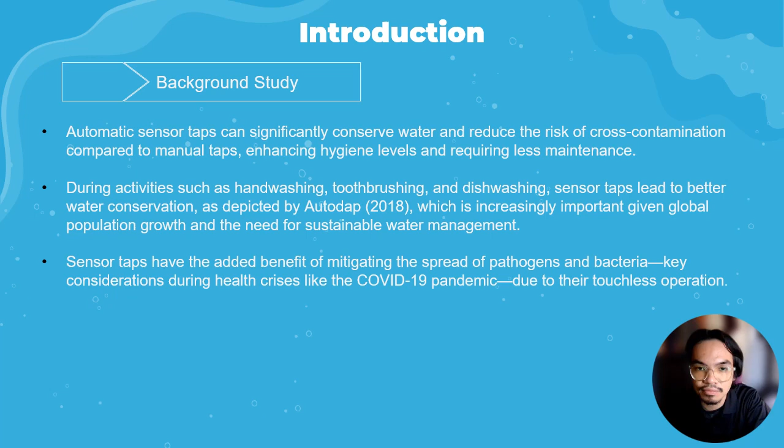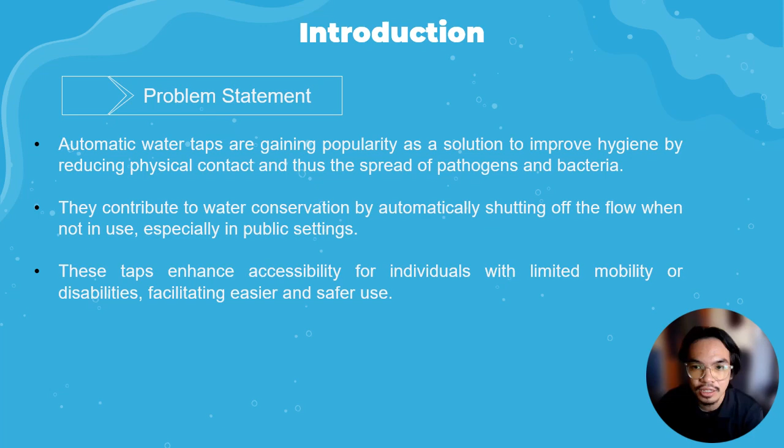The design of automatic tap control project tackles the pressing issues of maintaining hygiene and conserving water. Our automatic taps reduce the risk of spreading germs by limiting touch, save water by shutting off when not needed, and provide accessibility for those with disabilities.

Our design of automatic tap control project is focused on creating a tap system that not only conserves water and reduces time spent at sinks, but also minimizes congestion and manual touch points, thereby enhancing safety, minimizing space, and giving us a deeper understanding of PLC-based automation in tap systems.

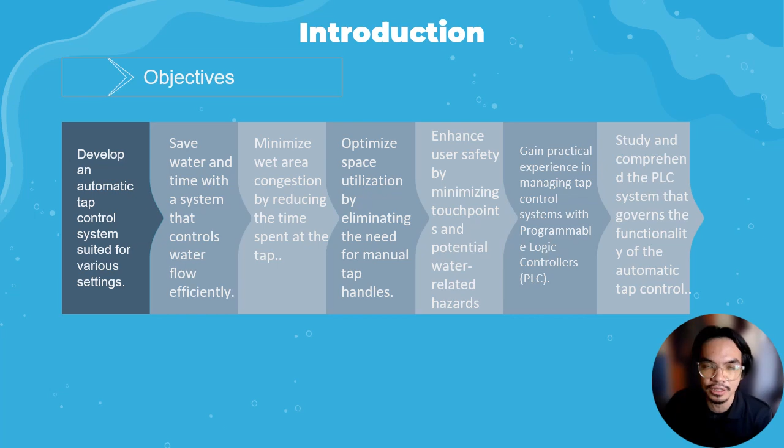In this section, we'll cover our methodology focused on 3 primary areas: concept design, design selection, and design evaluation. We'll see how each stage leads to the development of an optimized automatic water tap control system.

In the sphere of water tap systems, innovations span from Vani and Shrinidhi's Arduino-based remote control taps to Fitriyah et al.'s IR sensor-activated automatic faucets. Additionally, Hulukati et al. have introduced solar-powered taps with ultrasonic human detection, marking significant strides in water conservation technology.

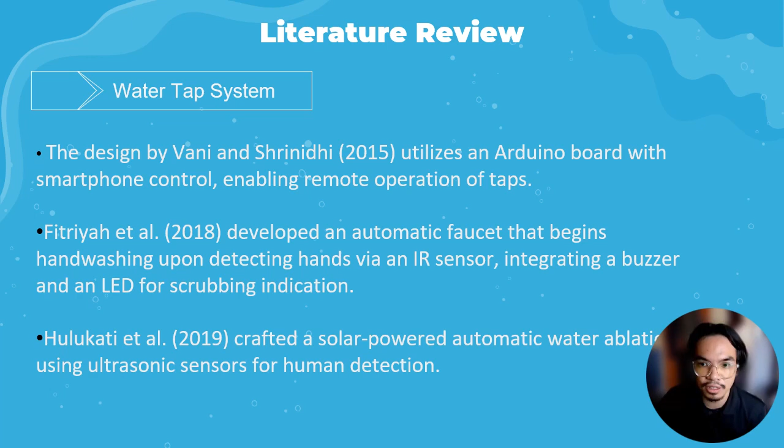Programmable logic controllers, or PLCs, are the backbone of our design of automatic tap control project, evolving since 1968 to become essential in process control and automation, interfacing with a variety of signals and programmable through intuitive ladder logic diagrams by engineers.

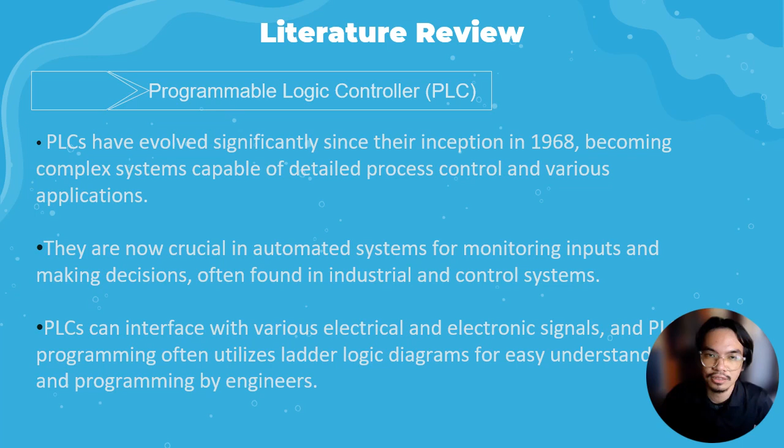Ladder diagrams are a key element in our design of automatic tap control project, simplifying the programming of PLCs for logical operations and enhancing their flexibility in managing our automated systems.

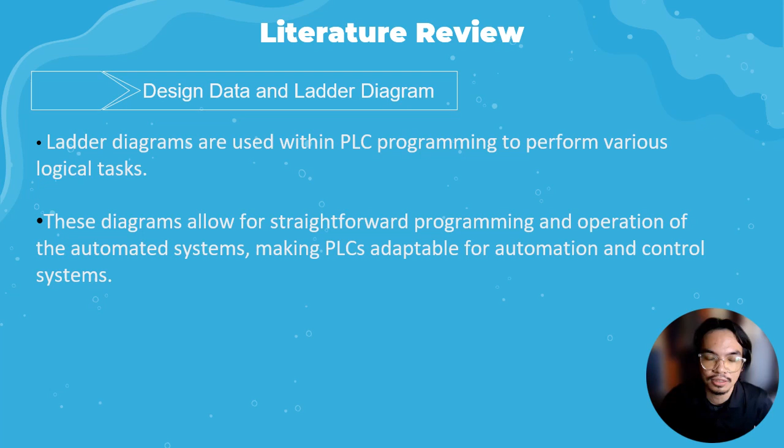Moving on to this session, we will cover our methodology, focusing on 3 primary areas: concept design, design selection, and design evaluation. We will see how each stage leads to the development of an optimized automated water tap control system.

Our approach was guided by an existing patent by Sloan Valve Company, which informed our choice of components. We analyzed parameters such as microcontroller type, sensor specifications, power source, and actuator model.

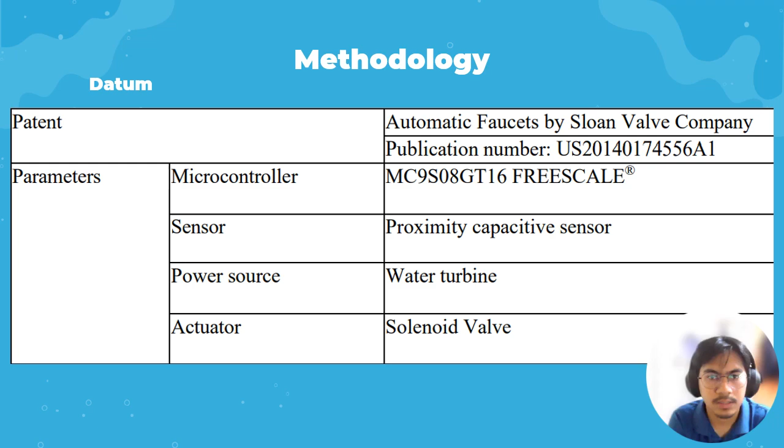We explored various alternatives for each component, considering different microcontrollers, sensors, and actuators, and evaluated them against our datum to ensure the best combination of functionality and cost effectiveness.

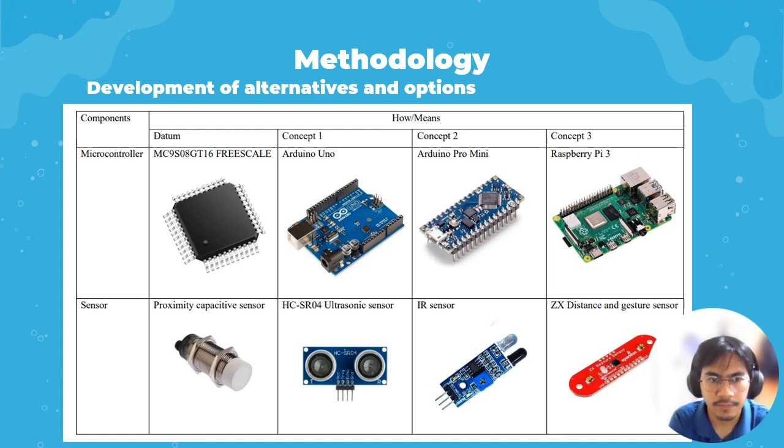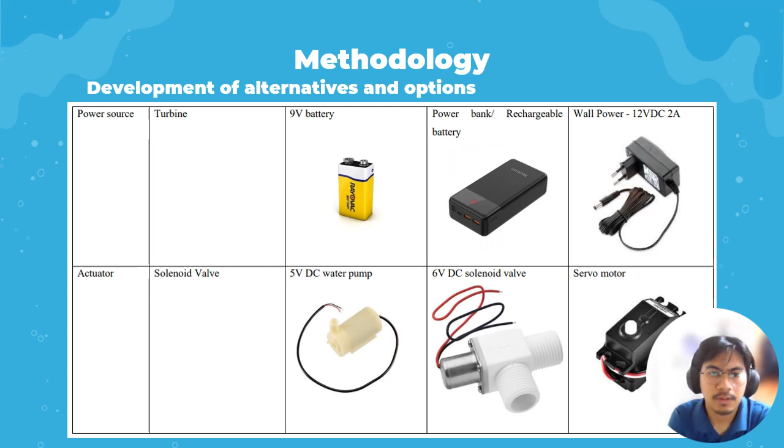Here we also detail our component options, from power sources like turbines or batteries to actuators such as solenoid valves and servomotors. These options were tested for compatibility and performance based on our literature review.

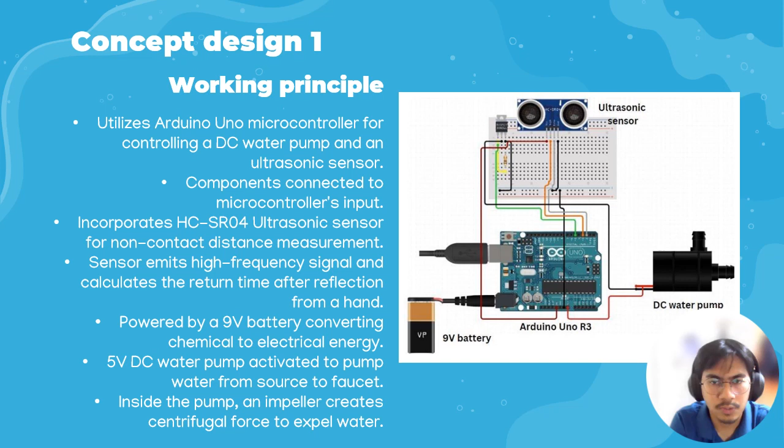So, concept design 1 uses the Arduino Uno and an ultrasonic sensor for distance measurement, controlling a DC water pump powered by 9-volt batteries. The focus here is on reliable sensing and efficient power use.

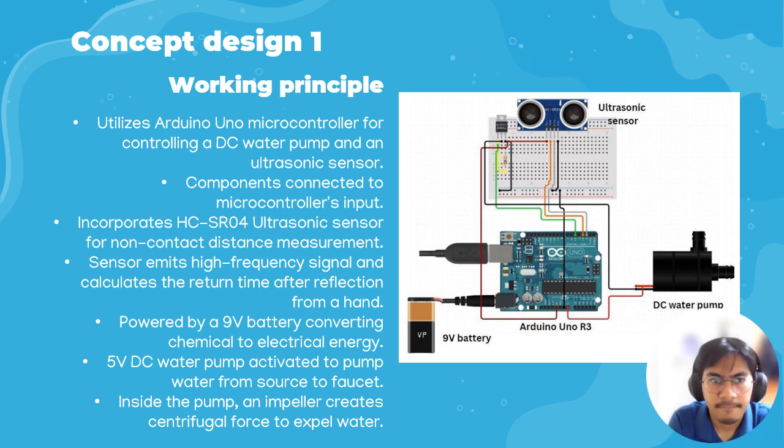In concept design 2, we switch to a more compact Arduino Nano and IR sensor for detecting presence. It's powered by a power bank for compatibility and uses a solenoid valve for water flow control.

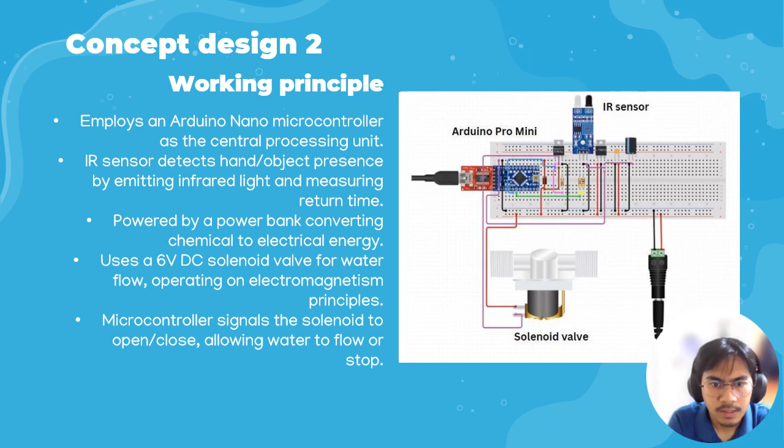Last but not least, our final concept design 3 employs a Raspberry Pi for sophisticated sensor data processing, using a ZX distance and gesture sensor for intuitive user interaction and a servo motor controlled by the Pi to adjust the water flow.

That concludes our visualization, where we have showcased our systematic approach in designing and selecting the optimal components for our automatic control system, each with a unique set of advantages.

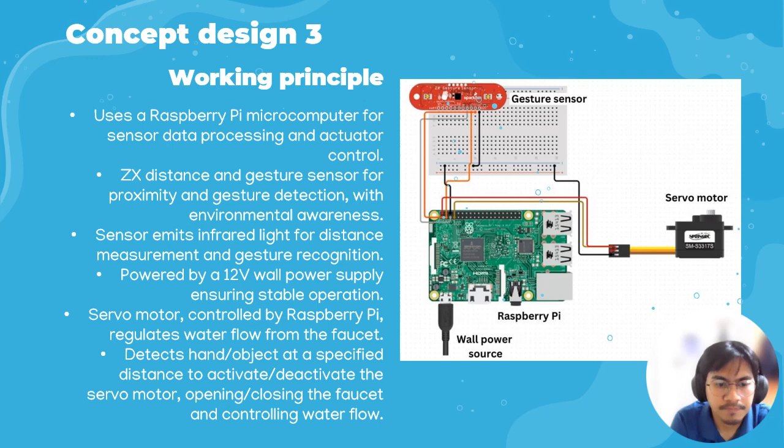Moving on to the decision-making process. In this part, we conduct an evaluation for all three concept designs as mentioned before. The proposed design will be fabricated according to the best concept design after a thorough evaluation. The design will be assessed using a weighted decision matrix or a Pugh selection matrix.

Moving on to the evaluation criteria, the selection criteria are chosen to align with the essential aspects necessary for a design with the best specification. We have three design selection criteria, which are the accuracy of components, the power efficiency, and the cost-benefit analysis. The first criterion is the accuracy of components. This criterion is based on the ability to detect user presence and consistently distribute water, achieving high reliability and precision.

Next, the power efficiency factor. The significance of evaluating power efficiency as a selection criterion cannot be overstated. This is because power efficiency directly impacts the system performance, operational lifespan, and environmental footprint. By prioritizing power efficiency during the selection process, designers ensure that the system can function optimally while minimizing the energy consumption.

Furthermore, in scenarios where access to a power source may be limited or intermittent, such as in remote locations or during power outages, an energy-efficient design becomes even more critical for maintaining continuous operation. Therefore, incorporating power efficiency as a key selection criterion is vital for the design itself.

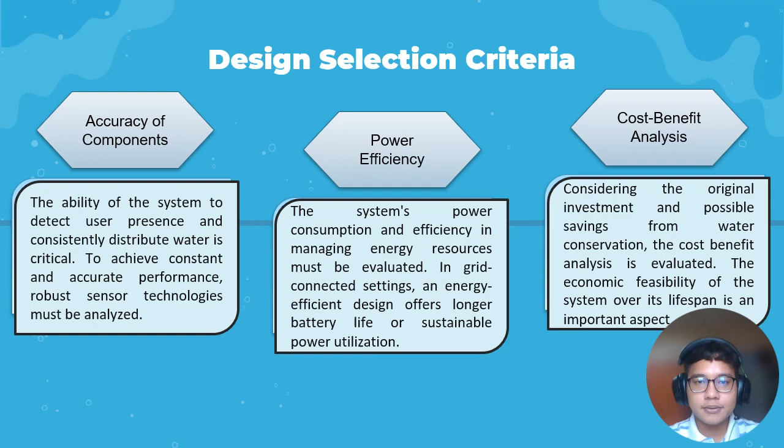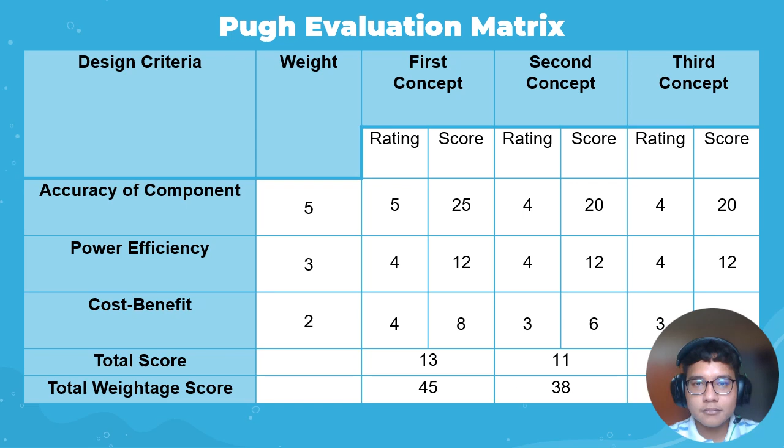After the evaluation, the final selected concept design is as illustrated in the figure. The final concept design, which is the circuit design, consists of an Arduino Uno R3 as the main controller, the DC pump responsible for controlling the water flow, and the ultrasonic sensor for the detection of a hand in proximity. And all these components are connected to a MOSFET.

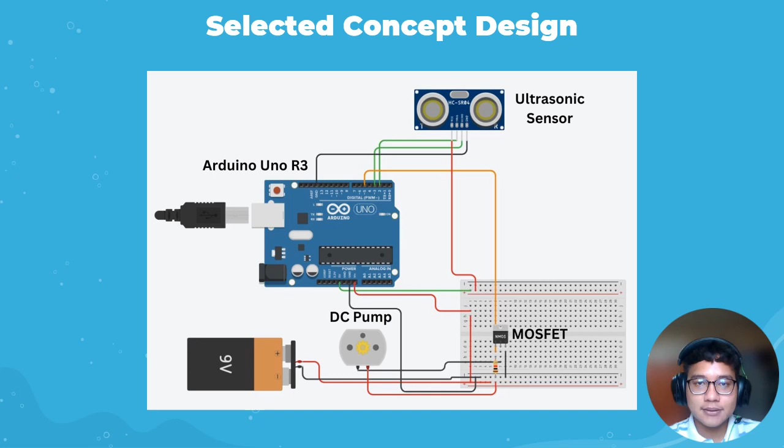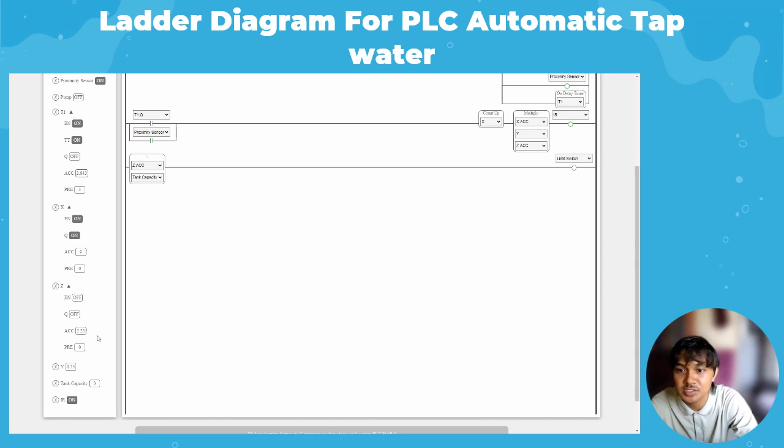So here you can see we're trying to integrate an internal relay and a timer so that there will be no waste of water and the system will be more energy efficient, because for this particular simulation we only set the timer as 3 seconds. So when the proximity sensor senses a movement, the pump will only let water flow in for around 3 seconds to reduce waste of water supply.

Besides that, we are also trying to integrate the counter, which can measure the tank every time water pours out of the water tap. So as you can see from the video, on the left side you can see the value of the variable. As the water pours out, it will also measure the level of the water in the tank capacity.

So when the water reaches the tank capacity limit, it will initiate the limit switch that will automatically cut all the system so that it will stop the pump and the sensor, thus protecting any component of the water tap from damage by over voltage or over current that flows through the system. So, okay, then moving to the next slide.

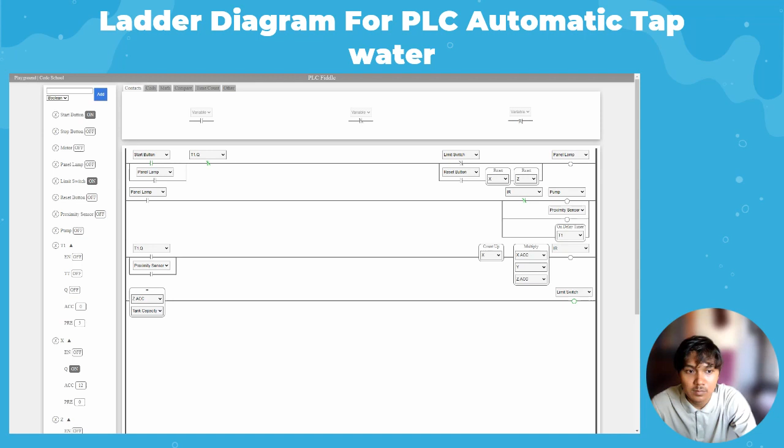So for this part, I will be explaining the ladder diagram system rung by rung. For the first rung, we have the start button and T1, which is the timer. It will be connected to a limit switch and a reset button, and there are also X and Z, which have their own variables that will be reset if the reset button is pressed. The first rung will create an output of the panel lamp, which indicates the system is on or activated. So we latch the panel lamp to make it continuously on.

For the second rung, the panel lamp will create an output that turns on the pump and the proximity sensor, and this will also be controlled by a timer which is set to 3 seconds. So it will make the pump or the proximity sensor run for 3 seconds, and it will turn off the pump and the proximity sensor if there is no movement.

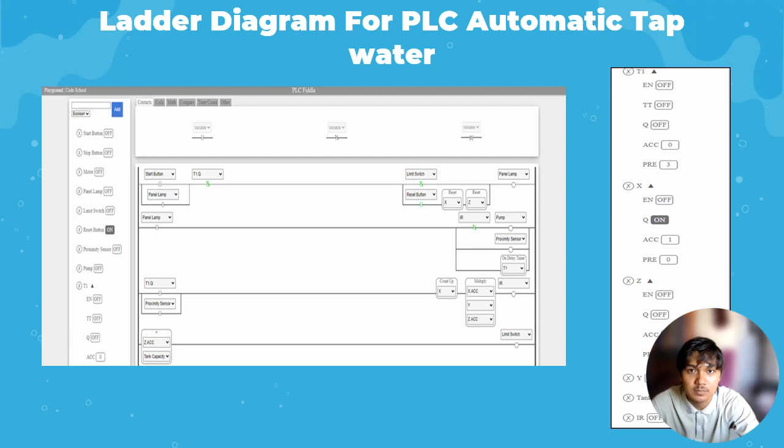Okay, for the value of variables and calculation of pump rating. Assuming that we use a pump with 5 watt power, an H max of 0.5 meter and F max of 300 liters per hour, we can convert the flow rate from liters per hour to liters per second and use the converted flow rate to find how much water is pumped in 3 seconds.

Convert the flow rate from liters per hour, L/h, to liters per second, L/s. 300 liters per hour converted to liters per second will be 0.0833 liters per second. Then we multiply by time to find how much volume the pump will dispense for the duration of 3 seconds it is running.

So calculate the volume of water produced in 3 seconds of flow rate. We get 0.25 liter, which will be the Y variable for the counter, 0.25 liters. So every 3 seconds, the pump will flow out 0.25 liter of water.

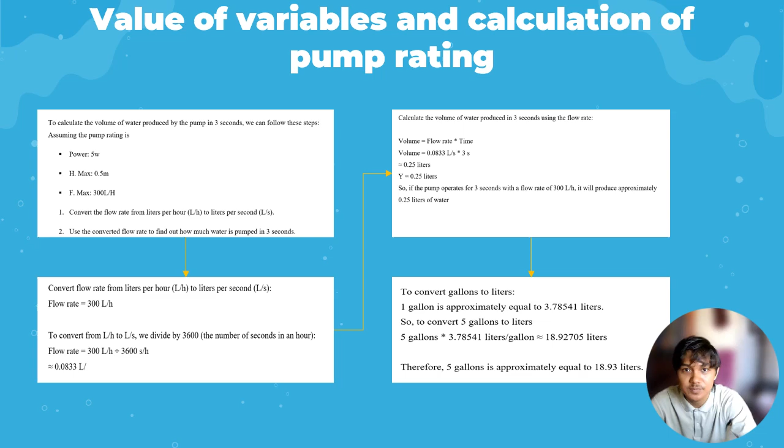In this section, we will cover our application, focusing on the usage of the automated water tap system in our daily life. We will see how the automated water tap system works and benefits the people. By implementing an automatic water tap system, water conservation is greatly enhanced. Traditional taps often lead to water wastage due to forgetfulness or negligence. However, with the automatic tap equipped with microcontrollers, sensors and actuators, water is dispensed precisely when needed and automatically ceased when not in use. This leads to significant savings on water bills and promotes overall cost saving and energy efficiency.

Automatic water tap systems also play a crucial role in promoting hygiene, especially in the wake of a global pandemic like COVID-19. The touchless operation of this tap minimizes the risk of bacterial contamination associated with the manual tap. By eliminating the need for users to touch the tap to activate it, the spread of germs from hand to tap and vice versa is significantly reduced. This touchless operation helps reduce the spread of bacteria and viruses, enhancing public health.

Another important application of the automatic water tap system is the enhancement of accessibility, particularly in public places or facilities catering to individuals with mobility issues. Users with impairments or those carrying objects find it easier to access water without physically turning the tap on and off manually. This improvement in accessibility enhances the overall user experience and promotes inclusivity in public facilities.

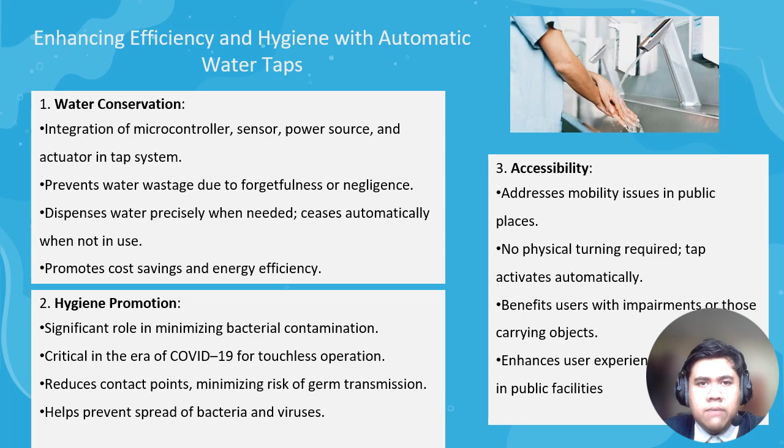In conclusion, automatic water tap systems have diverse applications ranging from water conservation and hygiene promotion to accessibility enhancement. By leveraging technology to automate water dispensing, this system contributes to sustainability, public health, and inclusivity in our communities.

Ladies and gentlemen, today we have delved into the pressing issue of water conservation amidst global population growth and clean water scarcity. Now let's wrap up by emphasizing the importance of adopting automatic water taps powered by Arduino technology. Firstly, we acknowledge that water conservation is paramount in our daily life. Given the challenge posed by the increasing global population and clean water scarcity, automatic water taps equipped with Arduino technology present a compelling solution to address this issue.

These innovative devices are programmed to dispense water based on the presence of a hand, ensuring controlled and efficient water usage. By preventing excessive water consumption and fostering mindful water usage habits, automatic water taps play a vital role in promoting water conservation in everyday activities. The implementation of automatic water taps in various settings, including households, public restrooms, and other water-intensive environments, holds immense potential to significantly reduce overall water consumption. This proactive measure contributes to alleviating water scarcity issues and safeguarding the availability of clean water for essential human needs.

In conclusion, embracing automatic water taps powered by Arduino technology offers a practical and effective solution to promote water conservation in daily activities. By integrating this innovative device into our water usage habits, we can collectively reduce water consumption, preserve water resources, and contribute to a more sustainable future.